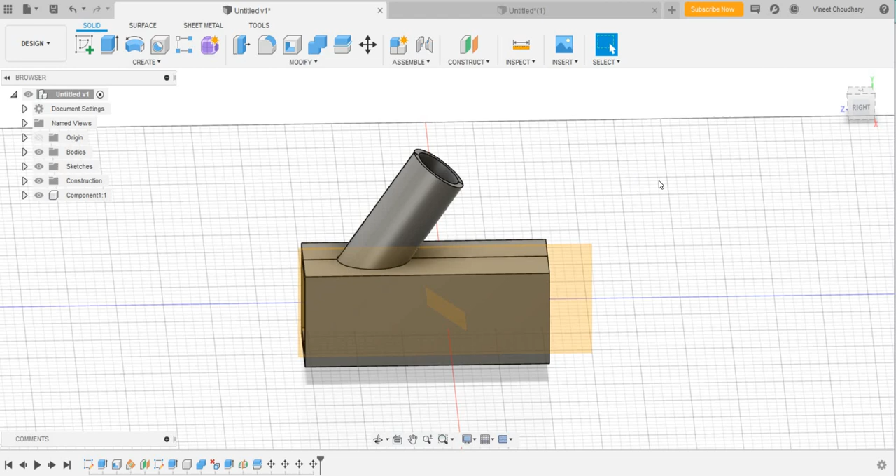Hello everyone, in the last lecture we learned about the tool Revolve, and in this lecture we will learn how to draw such a kind of design where one of the components is at an inclined position to another component. So let's start.

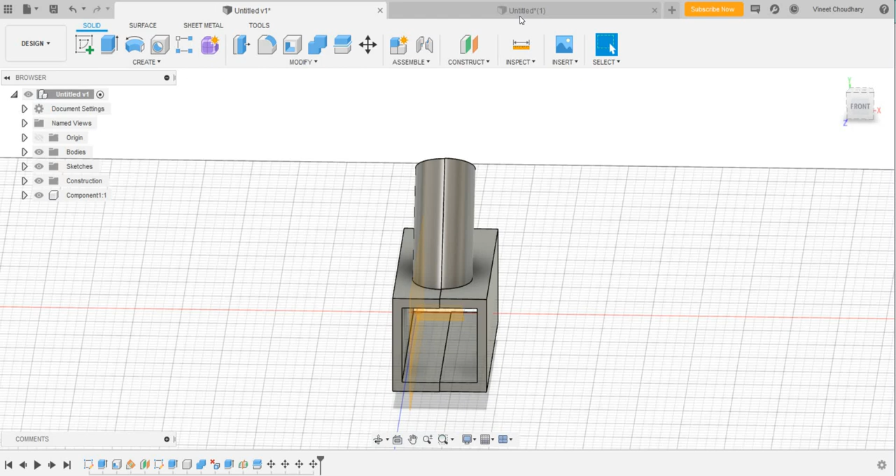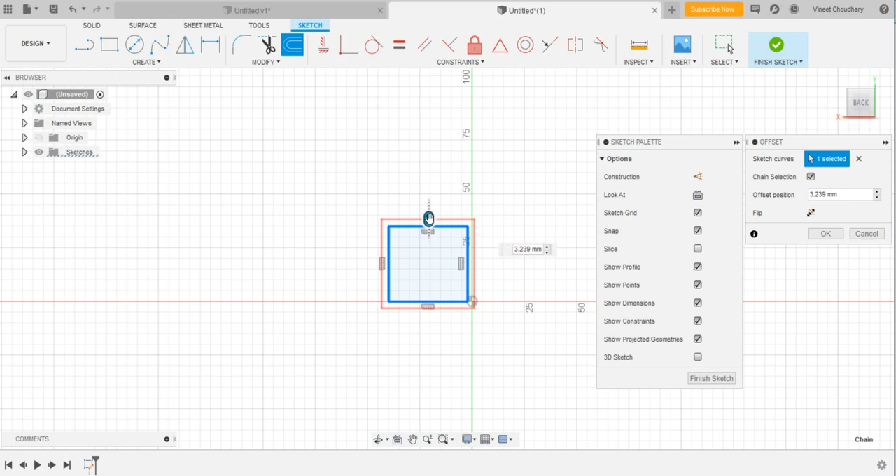So basically, first I have to draw this tunnel, which is square faced. So I will draw a square shape, a square body. Okay, it is kind of rectangular form. Okay, square. And then I would use this tool, offset. Then I would extrude it by pressing E on the keyboard and click the plane which I wanted to extrude. So it is extruded fine.

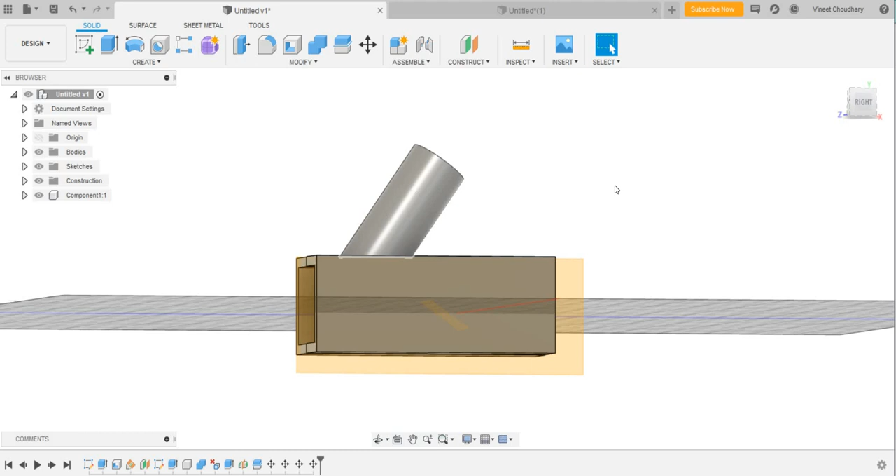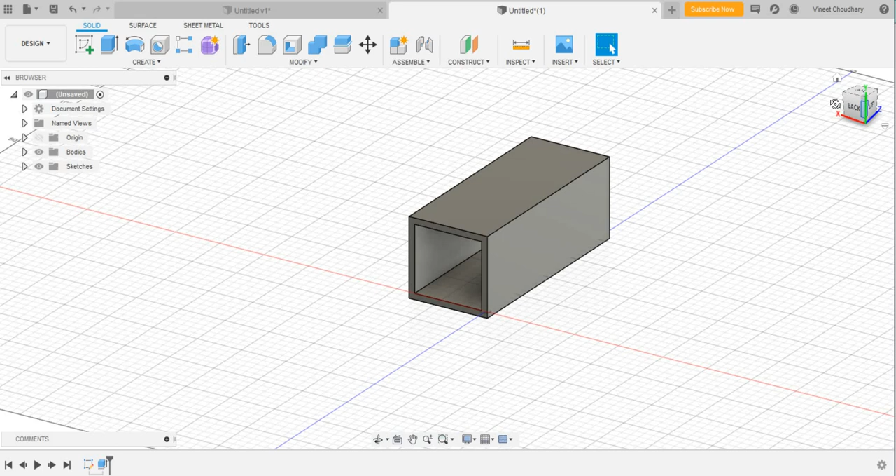Now here the actual complication starts. The inclined component can be made in different ways, but I will show the way in which the maximum number of tools are required. Generally we have only three inbuilt planes, XY, YZ and XZ, and I cannot draw a cylinder on these planes to make such a bent one. So I will create a plane which is inclined to this plane. So construct plane at an angle.

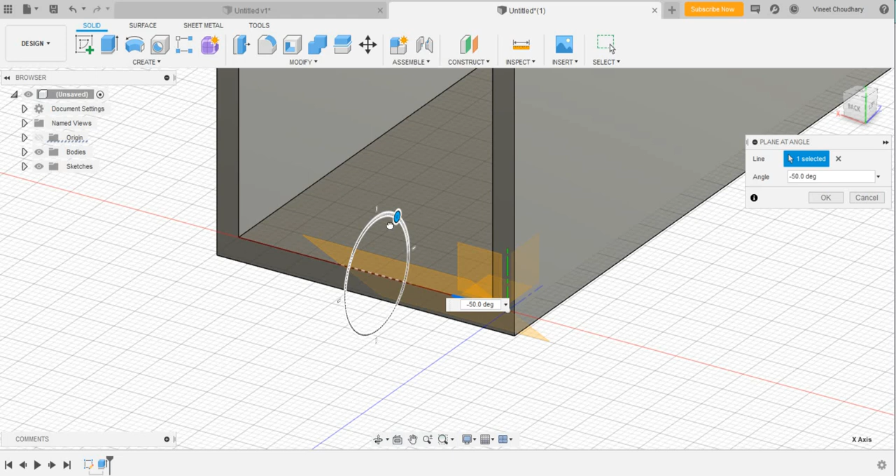The plane I will draw at an angle should be to this line. So I will draw something like this. You can see a new plane here. See, it's revolving, right? I need such an inclination, we shall consider 45 degrees. Yeah, it's fine. I click enter. Now this is the plane.

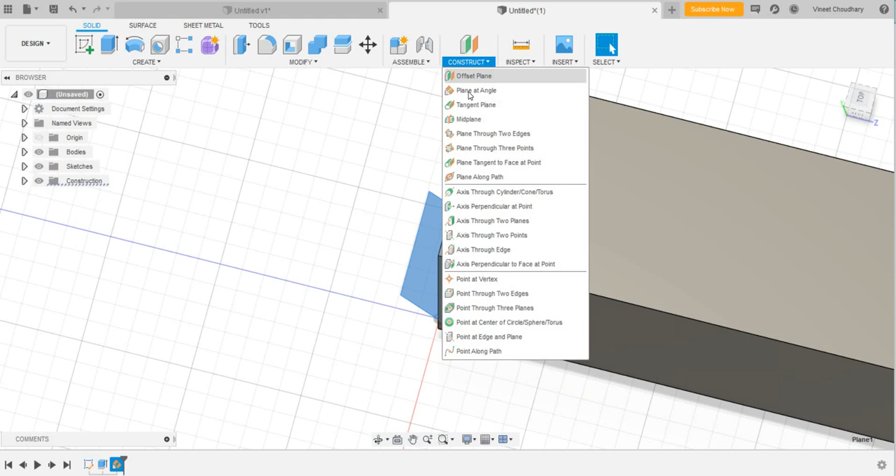Now I will draw a square on it, sorry, a circle on it to make a cylinder. Sorry, again I made a mistake. I will undo these things. By clicking offset plane I can bring this plane somewhat outside so that it is clear to look at. Okay, it's simple now.

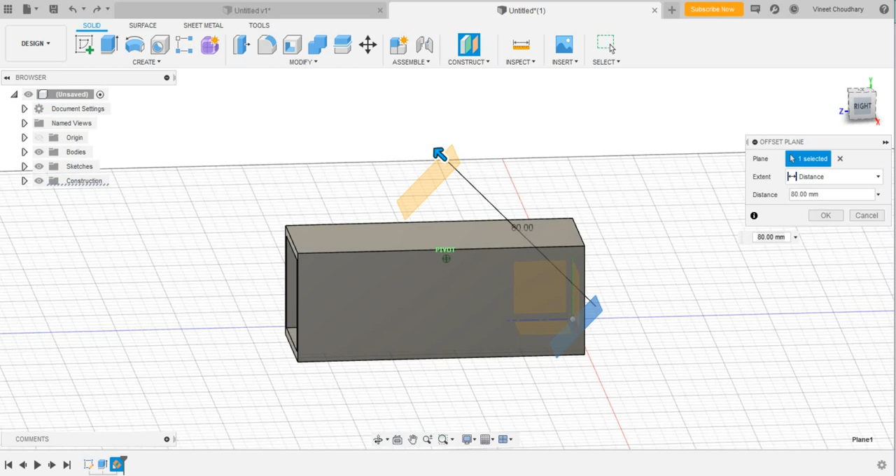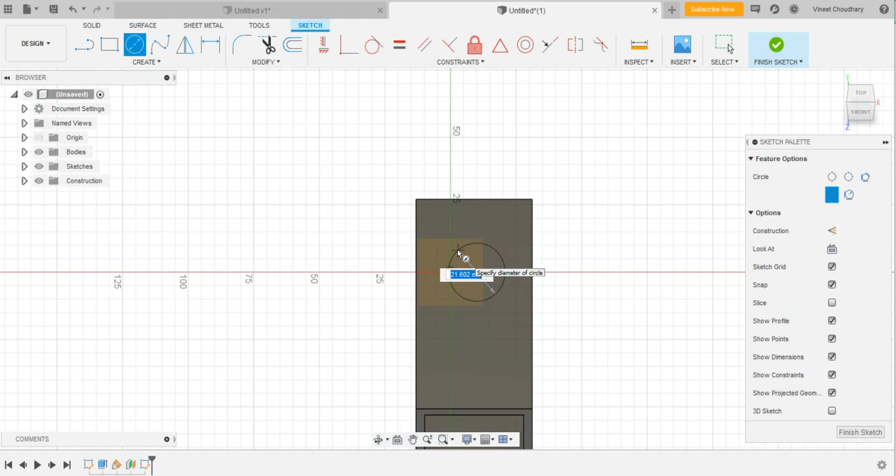Now I will draw a circle on it, press C, and click this plane. You can see the view has changed. And now I will draw a circle. Make sure that the circle center lies in the rectangle face of the other body. Click enter, and now I need a concentric circle, and then I would like to extrude this. So press E and select the face you want to extrude.

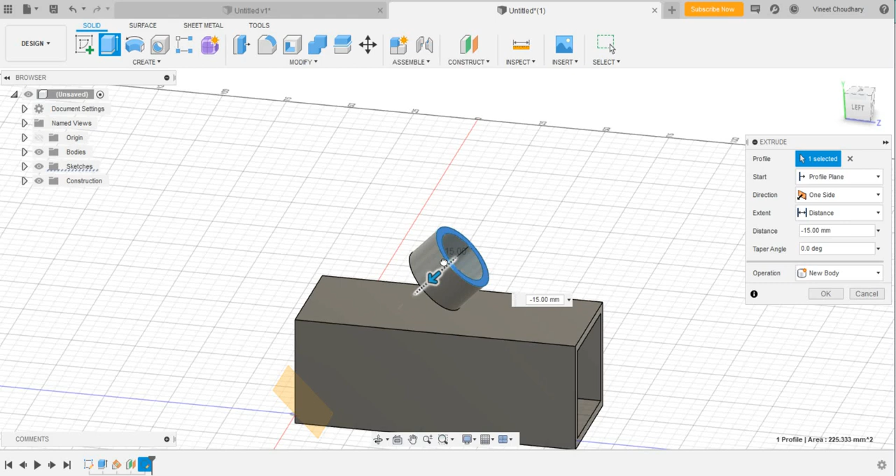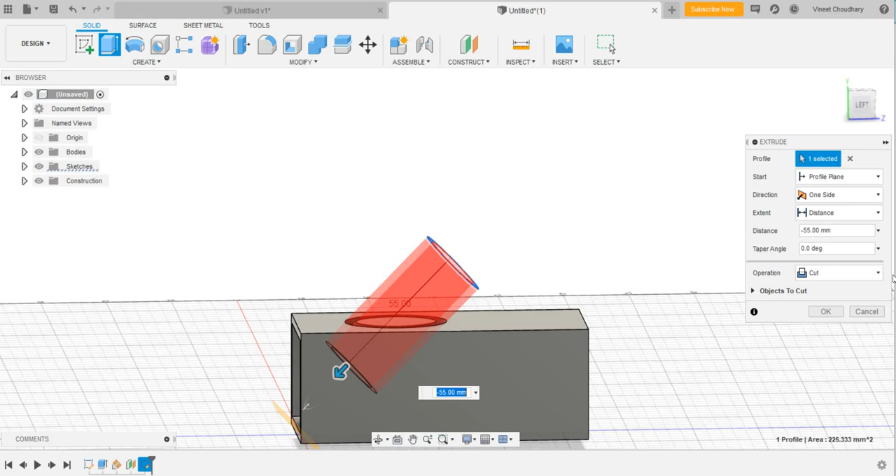Once I extrude, when the bodies meet, see the color changes from gray to red, which means the option is cut. Now this will not be visible to us. See, the bodies got intersected and now it is cut. I don't want cut. I need a new body here. So I'll say new body. Okay, now it's looking good, and then I'll press enter.

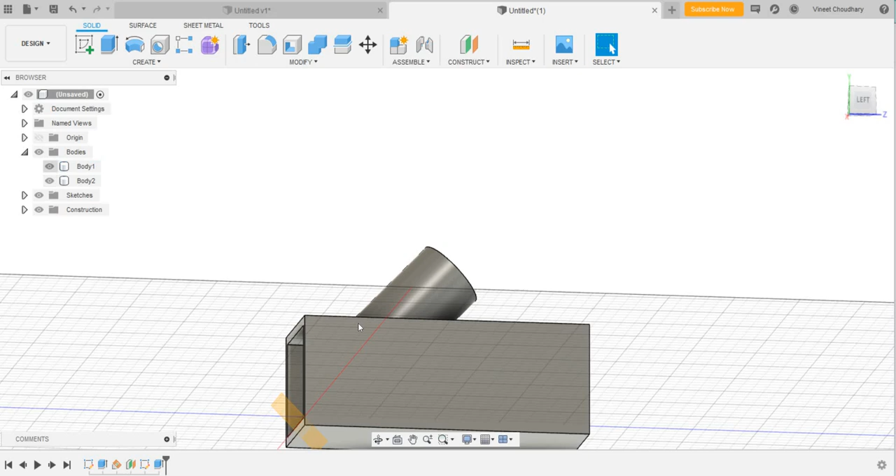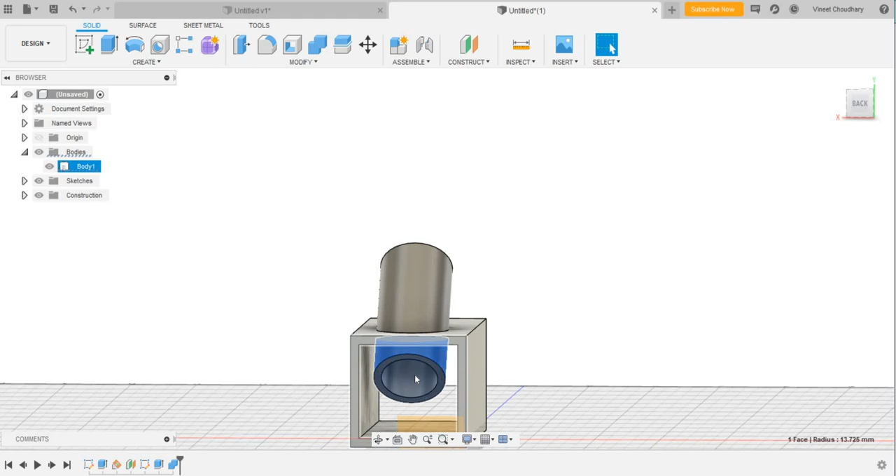Now I don't need the part which is inside this, so I need to delete this. Before deleting that, see when you click on bodies there are two bodies. I want to combine these two bodies, so modify, and here you will find the option combine. Click the first body and then the second body you want to combine. Click OK. See, these two bodies are merged into a single body, and now I don't need this body. So click here, it is selected separately, and click delete. This body got deleted simply.

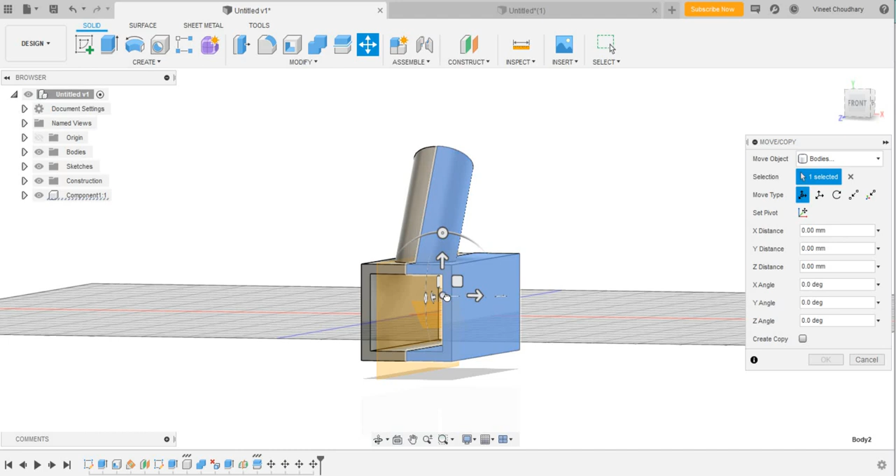It is almost similar to this, but there is another change, and the change you can see is that there is a kind of strip. What it is, see, these are separated, these are cut from the section equally. So I would like to do this. The cutting section should be symmetric. So I will construct one more plane, here I will find mid plane.

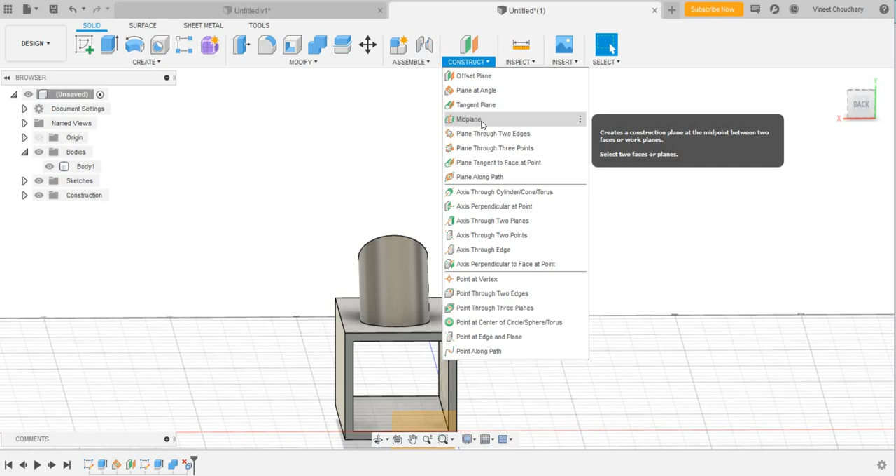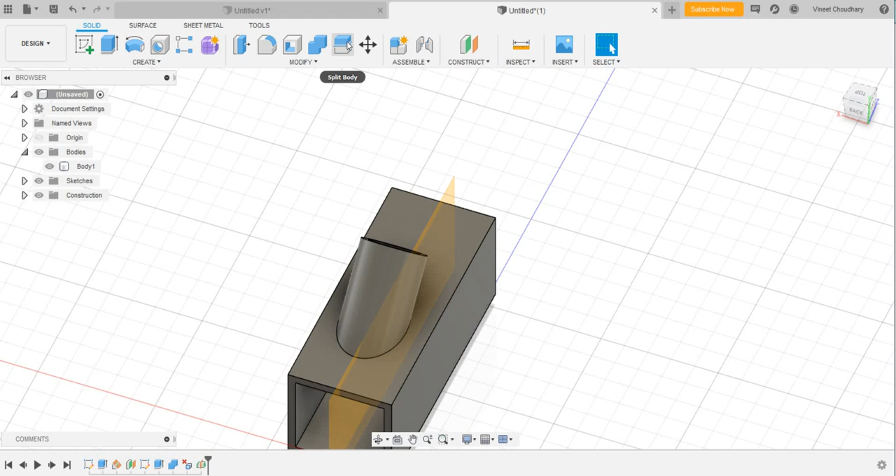I have to select two planes, and automatically a plane will be constructed in the middle of them, the first plane and the second face. You can see a green layer is formed, which is a new plane, and then press enter. Now I will introduce one more tool, which is known as split body. I have to select the body that I want to split. I have selected it, and then I have to use the splitting tool, from which the body should be split.

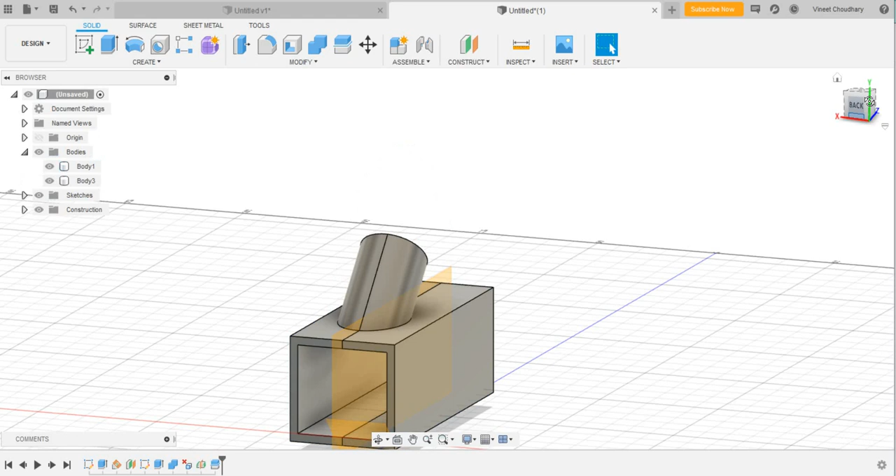As I have created the tool to split the body, I'll select the plane. See, I'm getting the option. Then press OK. See, the bodies are split, body 1, body 3. When I want to move the body, right click here, and you can see the option move, and click on bodies. See, I am able to move the body. So we will learn more about 3D figures in the next lecture.